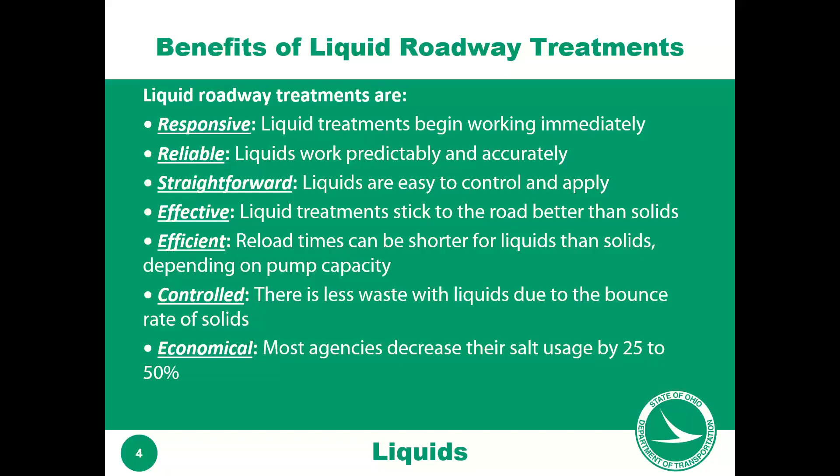What I'm going to talk about right now is a little bit of the three concepts. Pre-wetting is one of the concepts. Pre-wetting is applying liquids to the salt that is being applied.

So if you're applying salt to the roadway the old school way, when I first started here in 1985 at the department, it was salt coming out of the back of the trucks, put on a spinner and put on the road. One of the municipalities up here, we called it doorstep to doorstep, because they would run their salt and the spinner would be on so high, they'd spread it from door front to door front, all the way across the street, including the yards.

But now you can reduce this by putting liquid on at the spinner, and that's called pre-wetting. So when you hear somebody say, hey, I do pre-wetting, now you understand that that's what they're doing.

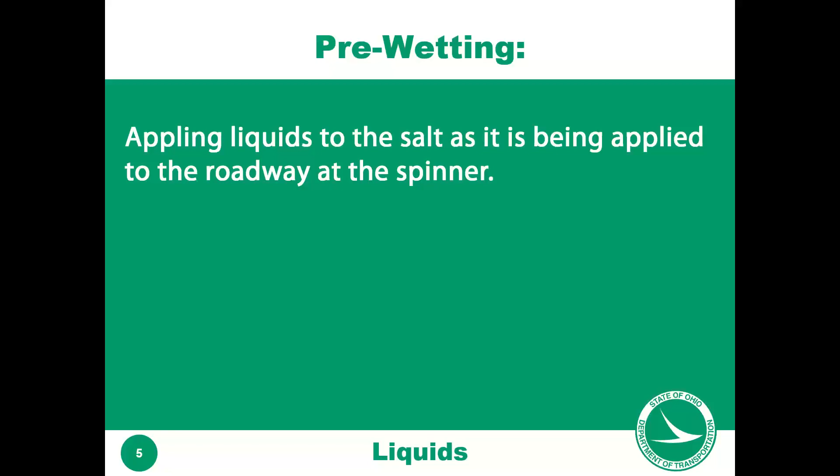A little bit about that bounce and scatter we were talking about. This was research done by the University of Michigan. Sorry for Ohio, but it was done by Michigan.

Without applying any liquid at the spinner, you're losing salt. Only 46% stays in the middle of the roadway, 12% on the edge, and 15% is lost on each side. So with no liquid at the spinner, you're losing 30% of your salt right off the bat, off the roadway. And after another 100 vehicles, only 20% of the material is left on the pavement. That's huge. To get 200 pounds a lane mile, you're putting down 800 pounds a lane mile to keep 200. You only need 200 down a lane mile, which is our max rate, but you're losing most of it.

So, bounce and scatter is a big thing.

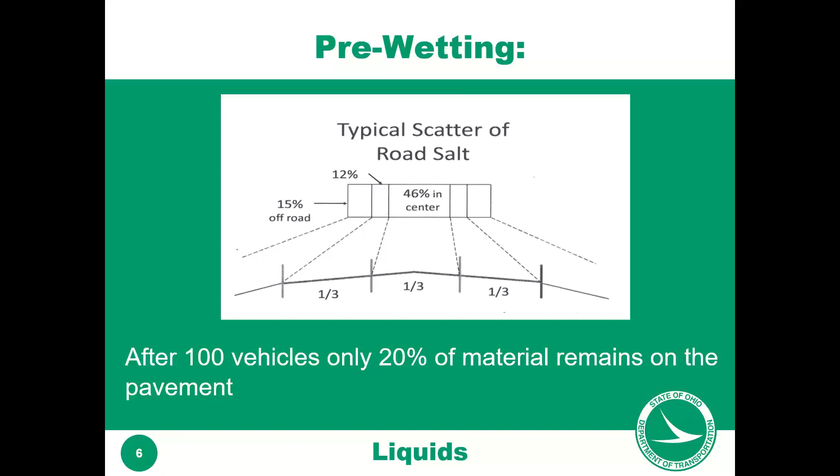Now, just by pre-wetting it, using 10 to 15 gallons a ton, if you're spreading salt and applying that liquid at the spinner at 10 to 15 gallons a ton, 78% of the salt stays in the middle, 9% on the edges, and you're only losing 4% total, about 2% on each side of the roadway. On a 2-lane road, you're losing 2%.

After 100 vehicles go over it, 80% of all that material is still remaining. So if your application rate is 200, you're going to be at 160, because you're keeping at least 80% of your rate there. So using liquid at the spinner is huge. Instead of putting down 600 pounds per lane mile to get your 200, now you can dial it in and use that liquid.

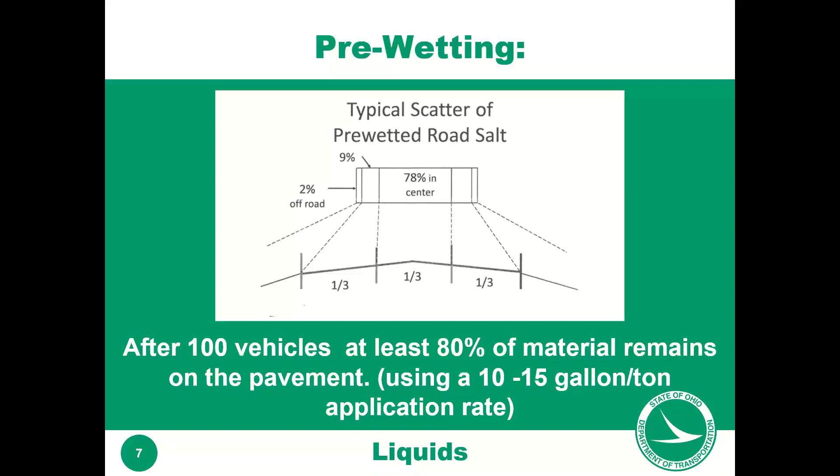The next thing we're going to talk about is what's next after pre-wetting, which is anti-icing. You hear it a lot where people talk about anti-icing. It's a proactive treatment, sometimes called pre-treatment, pre-treating the road. You hear a lot of places say, oh, we're going out pre-treating today. It involves the application of a liquid treatment prior to the onset of a snow event that prevents snow and ice from bonding to the roadway.

Very huge. When we pre-treat, we do a lot of pre-treating up here in Northwest Ohio. We'll get out ahead of an event, and when we know we're going to have a 4 to 6 inch snowstorm, or even a 2-inch snowstorm, we can get out ahead of it and apply a pre-treating of liquids on all of our roadways.

It used to take us 3 days to get most of our lane miles pre-treated. Once we went to our semis and our bigger applicators, we're getting it done in 1 day. We can get about 1,400 lane miles done, just in the 3 county garages that we work with a lot. We can get it done in literally 1 day versus what used to take 3 days.

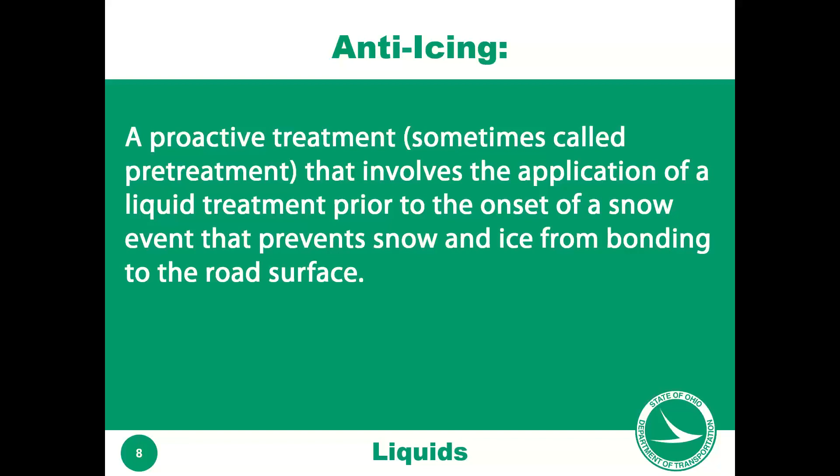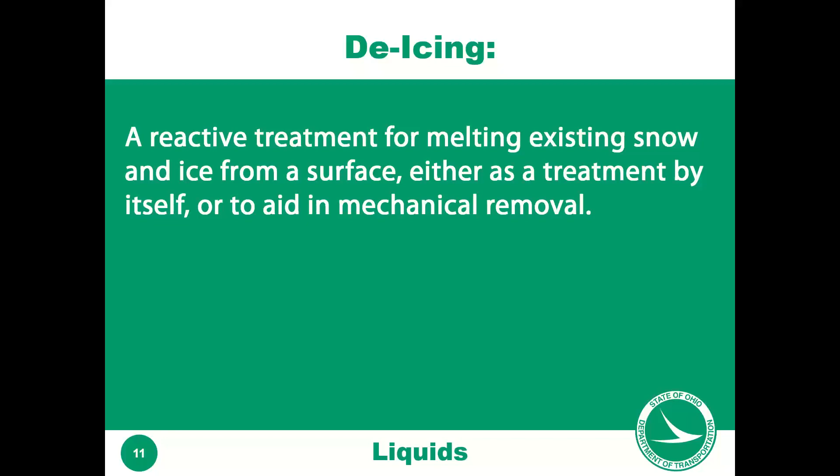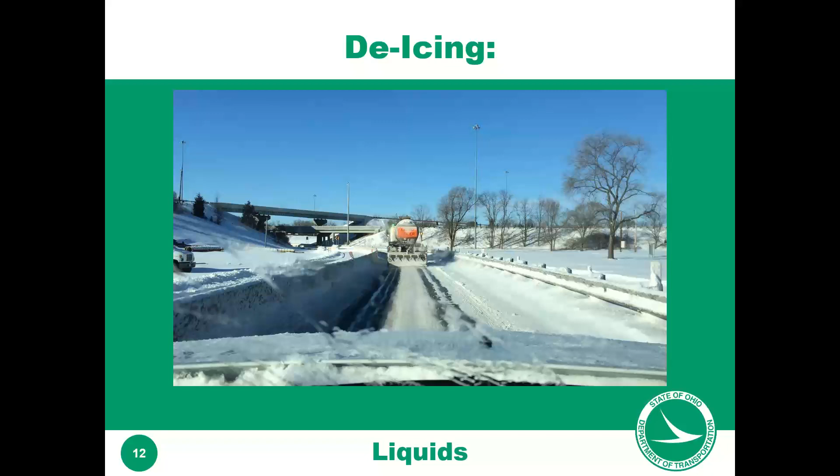The last thing we're going to talk about is direct liquid application. This will probably be the biggest thing. If you pre-wet your salt, you're going to create great savings and reduce your salt. But the big thing we are doing here in Northwest Ohio is direct liquid application. Basically it's the use of liquid-only treatments before, during, and after the storm event for anti-icing and de-icing combined. We will literally send our trucks out right as the storm's starting or just before and start putting down liquids.

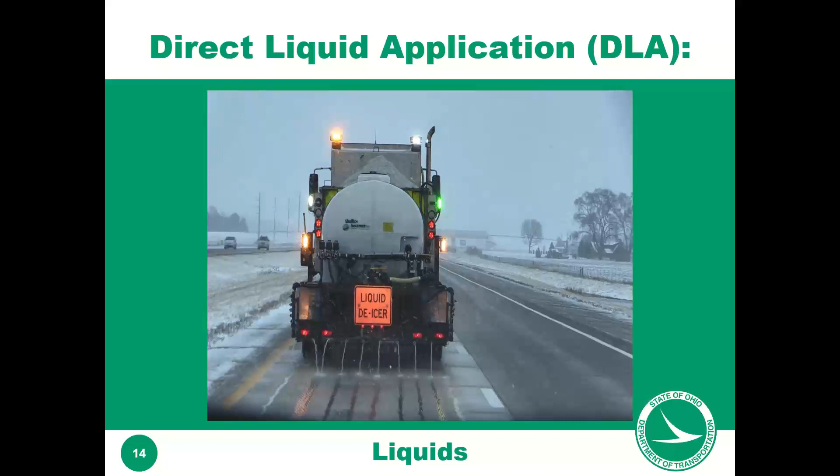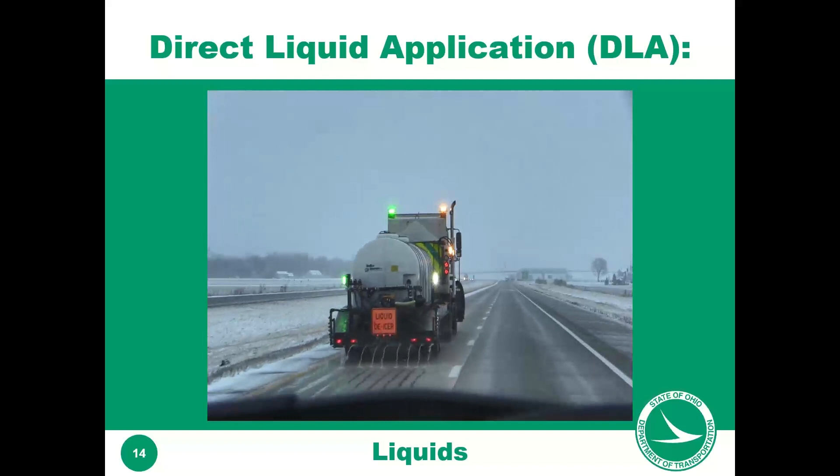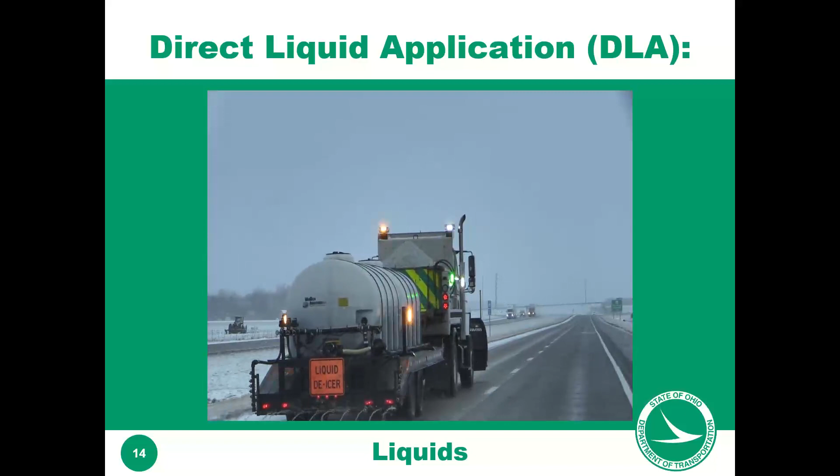This driver, one of our rural counties uses this now, but he can put salt down. If he feels that he needs a little bit more, he can throw down 20, 30 pounds a lane mile, or 100 to 200 pounds a lane mile if he wants to, or he can throw just 50 pounds a lane mile because he's putting down the liquid. His application rate is around 40 gallons a lane mile, and we'll show you here in a little bit on a chart. We use our chart, and basically it is based upon temperatures and amount of snow per hour.

Here's a quick video. This is our 475 around Metro Toledo. This is one of our semi units, and this is a liquid-only area. This is an area we'll talk about, liquid-only routes. This gets covered by our semis, where constantly, every 2 hours, they're putting liquid down, circling the City of Toledo and 475 area. As you'll see in this video, it's snowing to beat heck, and it's sticking on the bridges, it's sticking in the grass. It's everywhere except where he's applying liquid.

With our semis, just so you know, traffic's moving at 55 miles an hour here. The semis, the way they're built, they can apply at traffic speed on the interstate system. So they're applying at about 55 miles an hour, 50 to 55, so they're not getting in everybody's way. Traffic will pass him, no problem, they get in the other lane. Now you can see the bridge right here. The bridge is building up on the right and left shoulders, but not in the lanes where he's applying the liquids.

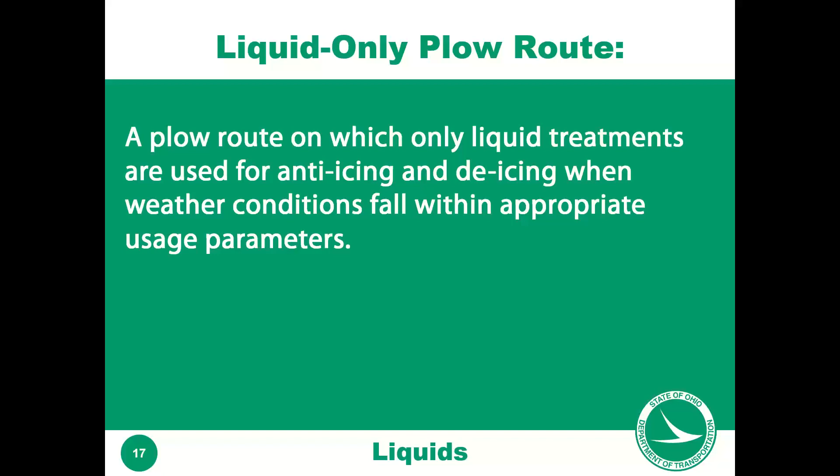Liquids help. And this is huge, and this is what Steve was trying to emphasize in his video - it minimizes post-storm cleanup, resulting in a quicker return to normal traffic speeds.

I'll give you an instance. The city of Bowling Green, and I work here and I live here, they used to push everything to the middle. For years and years and years, when they plowed their snow, everything got pushed to the middle. And it would take them anywhere between 3 days, 4 days, or more to remove all the snow they pushed to the middle.

They do exactly what Steve's doing now, where in the video you saw, they used DLA, direct liquid application, in the downtown area. And it has dramatically reduced their post-storm cleanup to almost none. They still plow to the center where Steve's video shows they still plow to the shoulder, but it's all melting, so the post-storm cleanup is huge.

For us at the Department of Transportation, we used to spend days after the storm plowing back points and plowing back ramp areas. When you get off the ramp, the section right there at the beginning is a point, and we would push all those back. Now they're non-existent. We haven't pushed back points in a long, long time.

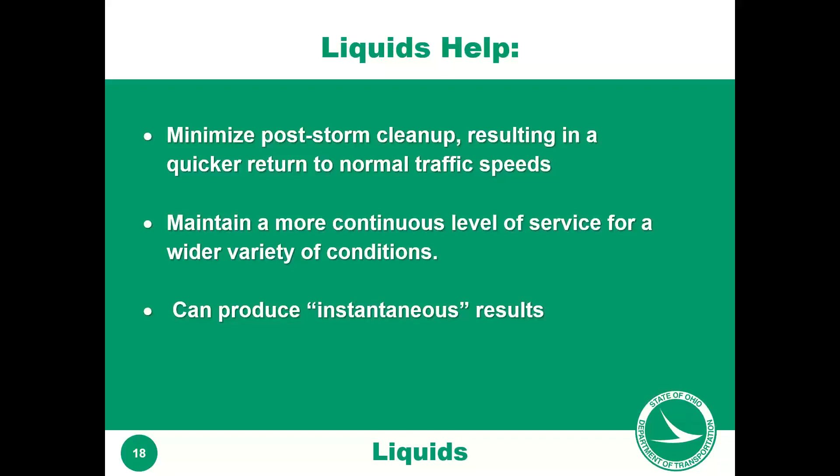And it's a big additional tool for us in the department, and I know everybody that's using it now thinks, why didn't we think of this earlier? It's a great tool for helping us and everybody fight snow and ice.

Dale, I'd like to add to that. Go for it, Steve, comment.

So those that have been fighting snow for a number of years, especially in small towns, instantaneous results, every operator wants to see, right? So if you have dry snow and an operator goes and applies salt, and if he goes back 20 minutes later and doesn't see any reaction from his salt, he'll go and throw salt again, and then you have these high numbers.

When you use liquids, that driver sees instantaneous results. He goes down the road, he spreads, that snow melts. He feels satisfied. That also helps with buy-in from your team. Your team will now buy into the fact that they're seeing results take place right away.

And the other item that's not listed on this list, liquids help the environment. Here in Worthington, sustainability and green are a goal of our city council, and we're reducing the amount of salt that is put into our streams and waterways. It reduces the amount of salt that deteriorates catch basins. So liquids help in a number of ways besides just buy-in and continuous level of service.

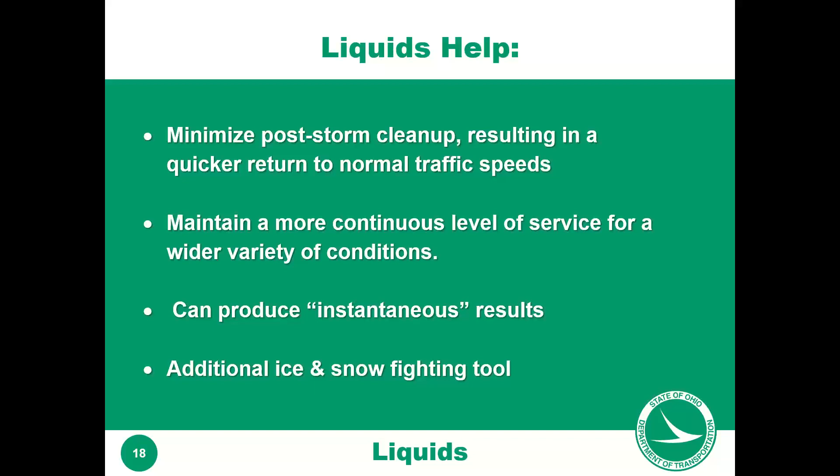Again, we are still doing direct liquid on priority 2s, but during any snow event, these roads, 58 miles of them, get direct liquid only.

We can talk a little further into the presentation, closer to the end, about our capability of running another truck behind this. Each road we visit at least once every 2 hours, in between fill ups and so forth, so we can hit every main. 2 trucks hitting every main in our city during any snow event once every 2 hours.

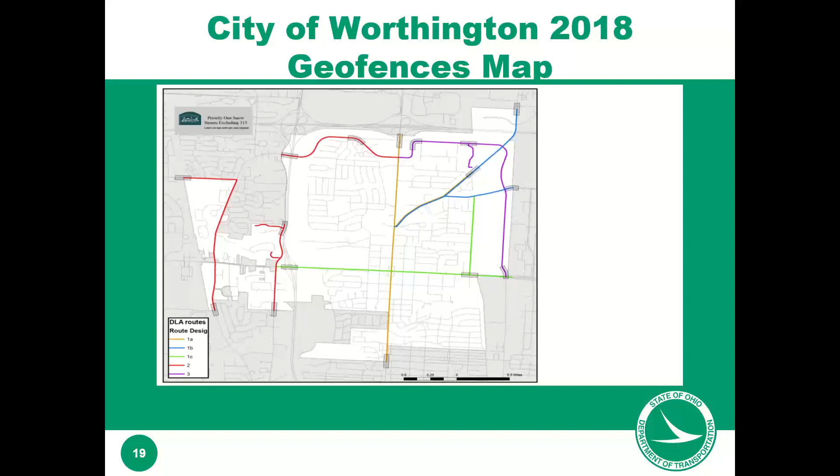We have not experienced that, especially in the 2021 season. In 2021 we went full bore, and we'll show that slide on how much liquid we used last season. But like I said at the beginning, we're still practicing, we're still learning. My team really has taken the bull by the horns, and they're the ones developing it. I'm just helping guide it. But this is a map of the mains that the City of Worthington maintains with direct liquid application.

I want to talk a little bit about reduced salt usage. If anybody has read the tons of articles in the Clear Roads magazines, Clear Roads has come out and said across the country that using liquids has been found to require 50% less material compared to granular-only applications. So I didn't want to believe Clear Roads, so we've been doing a study for a while.

We found right after that the reason we only got 10.5% was our operators were still trying to get buy-in with the liquid only. So like the semis, when they'd be out running the main lines doing liquids, our salt operators in charge of the shoulders and ramps were going out and hitting salt right behind them. So it wasn't giving us a true response.

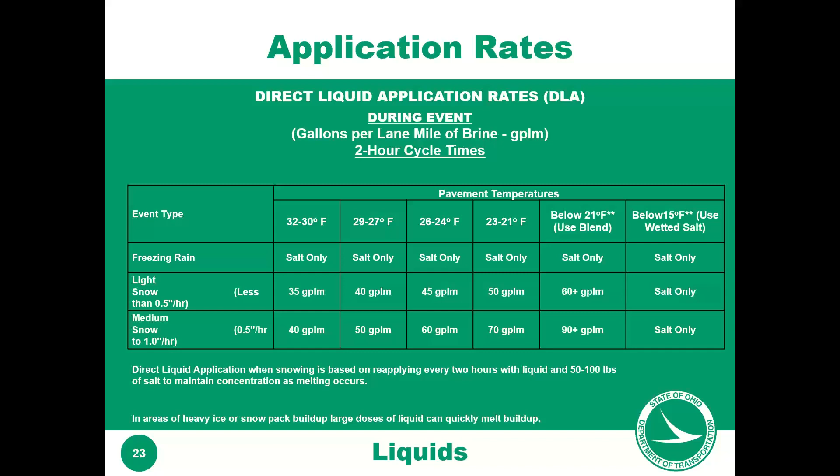Let's talk a little bit about equipment. Just in the Toledo metro area, we have 6 5,500 gallon tankers, one 2,800 gallon mini tanker, and 6 1,300 - and that number is going up every year because we are developing new equipment that'll carry 6 tons of salt and anywhere between 800 to 1,100 gallons of liquid all at the same time.

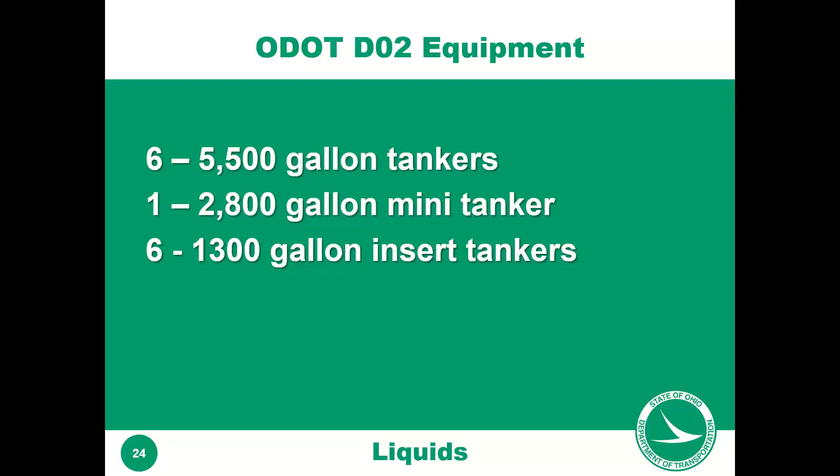So we can put down liquid on new inserts and put down 50 pounds per lane mile of salt. So we can get the best of both - a little bit of liquid and salt. We also have one small parking lot sprayer that we use to clean our parking lots, our district complex parking lots, where we use liquid only or liquid with very little salt.

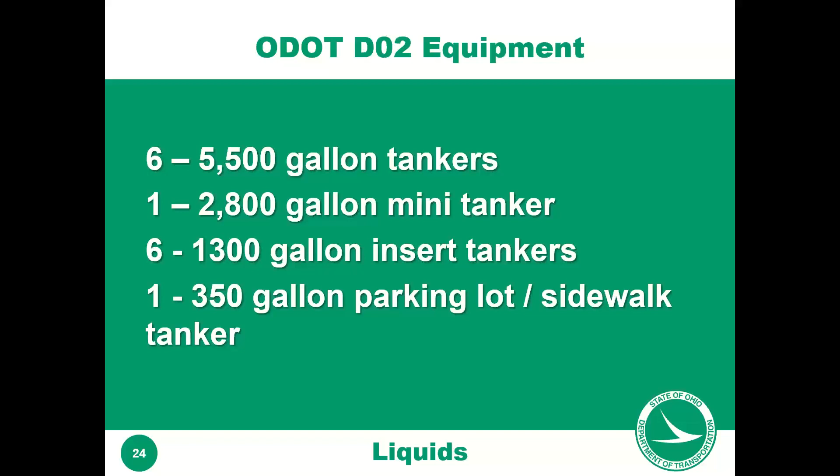This is a picture of one of our semis. This semi can put down anywhere from 10, 15 gallons per lane mile all the way up to the flood bar, which is huge. And like Steve said, I will invite anybody that wants to come see any of our equipment - feel free to contact me and come on up.

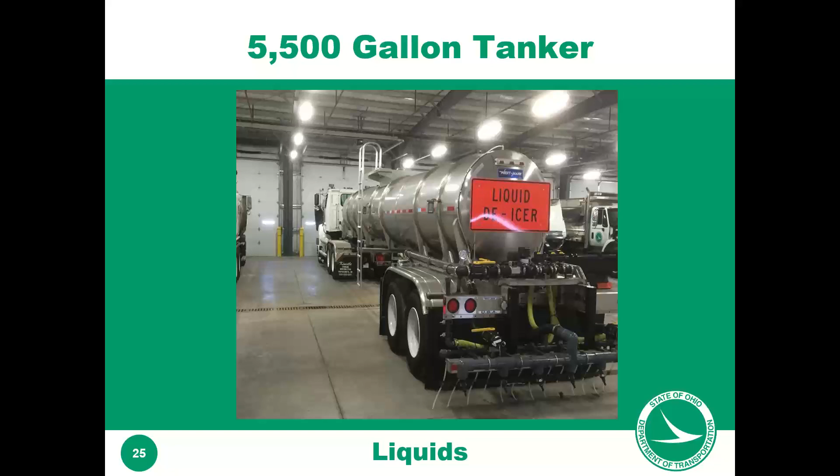But when we flood, we can flood all the way up to 800 gallons per lane mile if we wish. If we have some very big hard pack on some of our rural routes, we can go out there and flood it, and it will melt right through that hard pack, breaking the bond between the hard pack and the roadway. Then we can plow it off much, much easier, saving time and energy compared to trying to burn it off with granular.

This is one of these pull-on tankers, I think it's 1,800 gallons. And on the left side of the picture is our single axle with the 2,400 gallon trailer tanker.

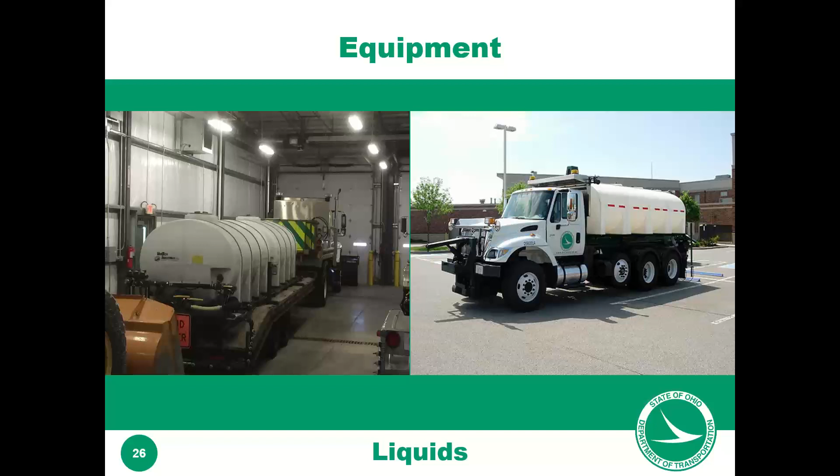So this is our brine machine. I didn't get any pictures of our trucks, sorry about that. We have 5 single axle dumps and two inserts - one is 1,300 gallon, one is 1,000 gallon. We just purchased another 1,000 gallon unit last year, so in the 21-22 season we'll have 3 dedicated DLA trucks. The brine machine here is a Henderson Brine Extreme.

We didn't have a bunch of money to go out and buy all this equipment right away, so we happened to be talking to Henderson when we were up purchasing a truck. They had this brine machine, a demo unit sitting in their yard. We negotiated with them and got it at a reasonable price. We also bought a brand new Truck Fill Pro to help us fill our trucks.

The thing about this brine machine is it'll make 6,000 gallons of brine an hour - but we didn't consider what size water line we have in our facility. That 6,000 gallons an hour figure is with a 6-inch water line. Well, we don't have a 6-inch water line, we have a 2-inch water line. So we're not making 6,000 gallons an hour, we're making about 1,300 gallons of brine an hour.

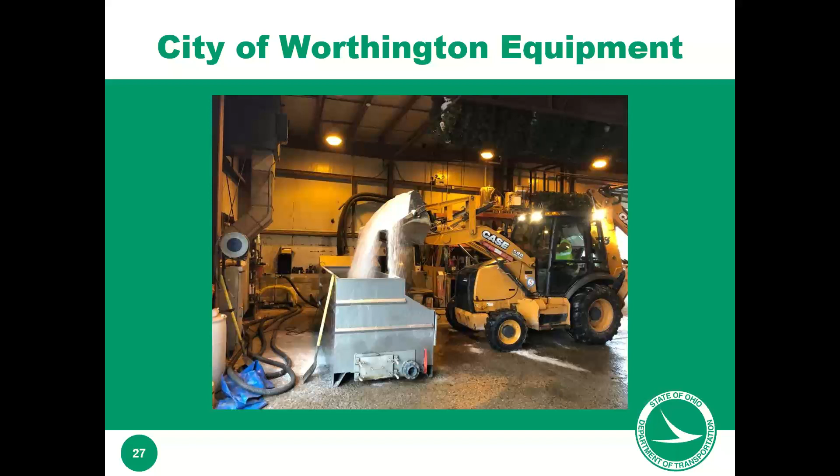So when we get an event, we have the capability. If you go to the next picture, it shows our storage - we can store 36,000 gallons of brine. We have one dedicated tank for beet heat concentrate. We don't do any blending; we'll just follow up with salt if we get into temperatures below 21 degrees pavement temperature.

The reason for that is just think about the budget, right? You have 1,000 gallons of brine, but if you do a 30% mixture of beet heat at $1.48, that's 300 gallons per load. That's way too expensive for us to do.

We have another tank there that we could put calcium in. Like I said earlier, we're still practicing. But when we get an event that's coming, all of these tanks are already full, and then we start making brine as soon as we start depleting the tank. So our staff - somebody running a truck or a DLA truck - they just monitor the brine machine as the event is going on.

It should work flawlessly, it's like every piece of equipment - it works when it works, and when it doesn't work, it doesn't work. But generally we can put salt in it, it'll continue to make brine and fill these tanks as we're using them, and we have not run out during an event yet. One of the biggest things - Steve talked about your water.

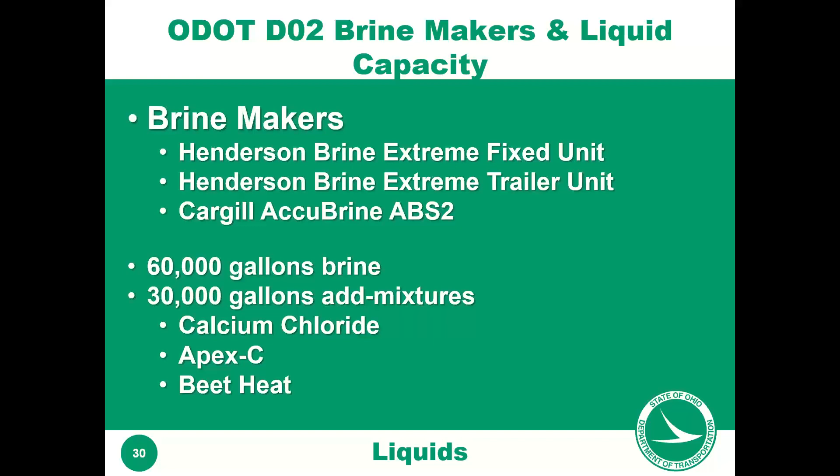My liquid usage, just for 2019 in the area: we used 23,000 gallons of Beet Heat, 40,000 gallons of Apex C, and only 5,900 gallons of calcium chloride. We are trying to use as little calcium chloride as possible, as calcium chloride is a steel-eating liquid. It will eat up things that you didn't think it could, but it will. So we're trying to reduce the use of calcium chloride as much as we can. And our salt brine usage was about 2.2 million gallons.

And again, when we're saving 39% off of our salt and our hours, we're getting, just like Steve showed in his chart, about the same type of savings out there. That's huge for us. It sounds like a huge amount of gallons, but it saves us a tremendous amount. Go ahead, Steve. We used 313,000 gallons of brine last year.

Corrosivity is something we were concerned about, especially for our trucks. We're putting liquid brine down on a regular basis, so we invested in a new power washer with an undercarriage washer, and bought some salt neutralizer. After an event, we make sure we clean our underbodies, even though we have stainless steel beds, because using brine as much as we were was a concern. So we've stepped up our game on cleaning.

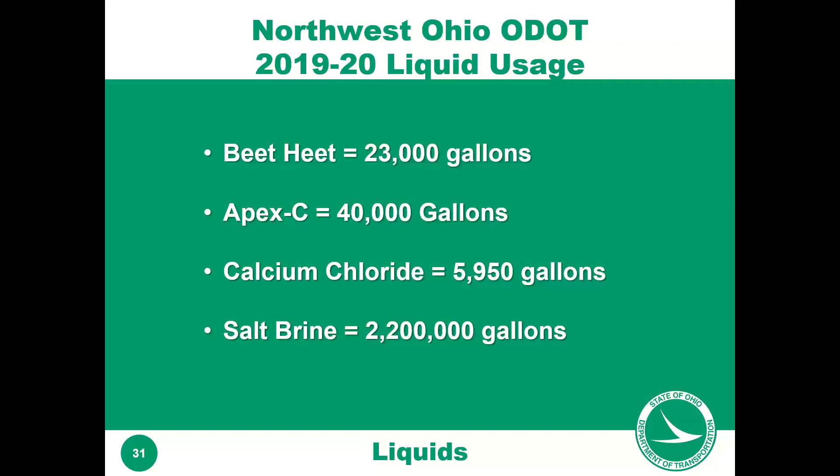This was a study we did on a rural 2-lane road where we let it go to hardpack because we wanted to check what we could do. This was January 13th, 2016, 10 degrees out, a 5.5 mile, 11 lane mile section, with a 5 mile an hour wind. We went out on the hardpack and spread 3,500 gallons of 85-15, meaning 85% brine to 15% of a product back then called Aqua Salina, very much like an Apex C liquid now. We did 6 passes at about 40 gallons a lane mile, going down and back each time to check how it was doing.

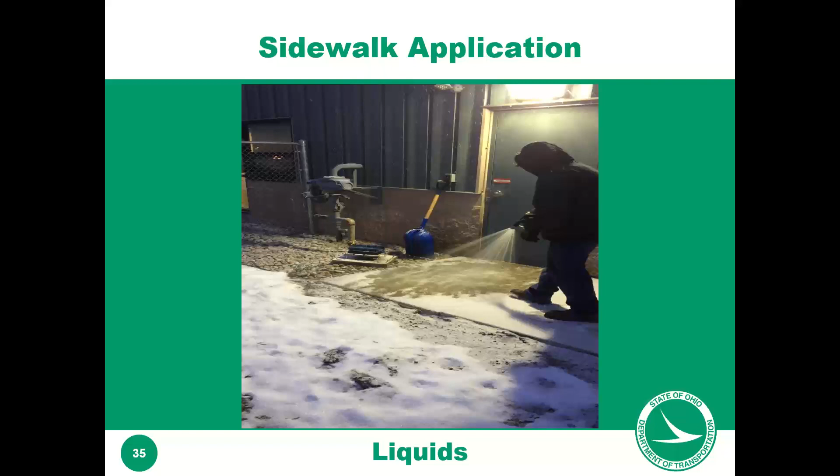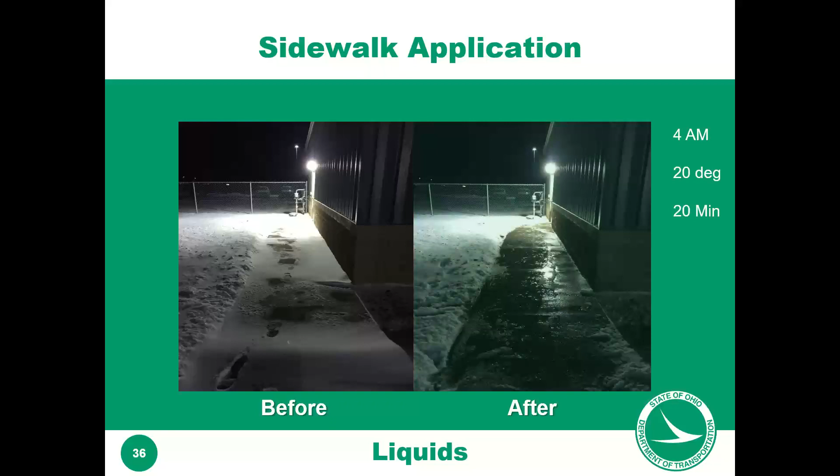Here's a section around one of our buildings. This was before, at 4 a.m., 20 degrees out, and we sprayed it with straight brine. 20 minutes later, that's what you got. And that's at about a gallon, half a gallon per square yard.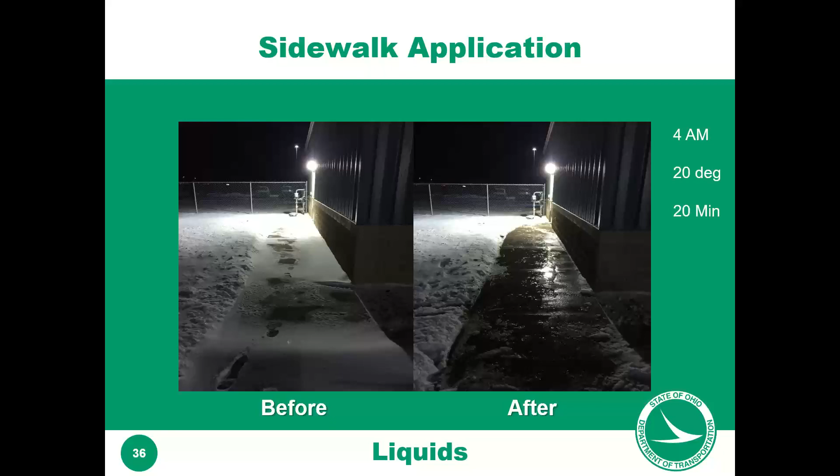These are pictures from the City of Bowling Green. They pre-treat, and then during the storm they have a sprayer that sprays all their sidewalks and around their municipal buildings, including the stairways going up into them. We do the same thing at our district complex. It keeps salt from carrying up the steps and onto people's shoes as they walk in.

One thing I'll tell you: if you're a small municipality getting into spraying liquids, do not use Beet Heat or that brown liquid, the beet-based liquids, even in a blend, on staircases or sidewalks leading into a building. The first year we did it, we ruined all the carpet in our main entrance area because it had a brown tint, and everybody walked in with their shoes, and guess where it all went? Right onto the carpeting. So from experience, use straight brine, straight liquid, okay?

Regional partnerships, we're near the end of the presentation, but I want to talk about this. It's effective in large and small cities alike, involving villages, townships, and parks. We have a park district here that doesn't use salt at all, only spraying their roads in the park. It's the Toledo Metropolitan Parks District. They only use liquids, pre-treating their roadway, plowing it, and then coming back to flood it as best they can. They do multiple passes and burn off anything remaining, but they've prevented bonding because of the pre-treating, then plowing, then putting liquid down. They do not use granular salt at all, it's all liquids only.